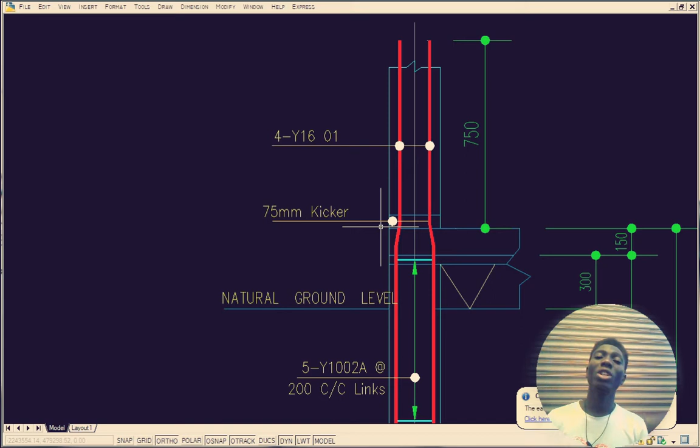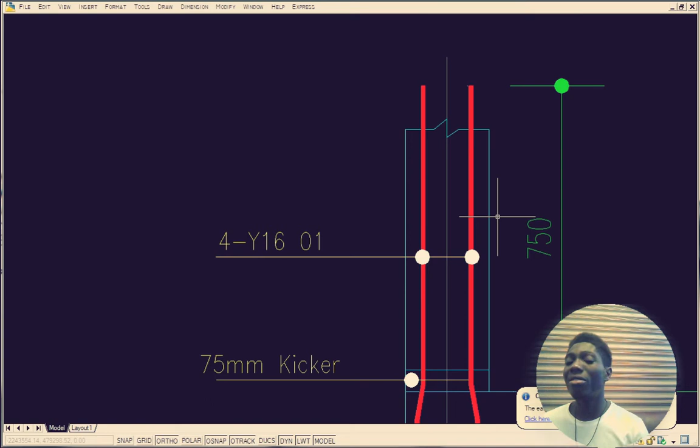So that is that. And then the next detail we'll see is 4Y16. What is that? We need 4 of Y16 to be inside this column. So depending on the cover of the column is what will determine the area of reinforcement and the area of concrete. So that is how we get to calculate that.

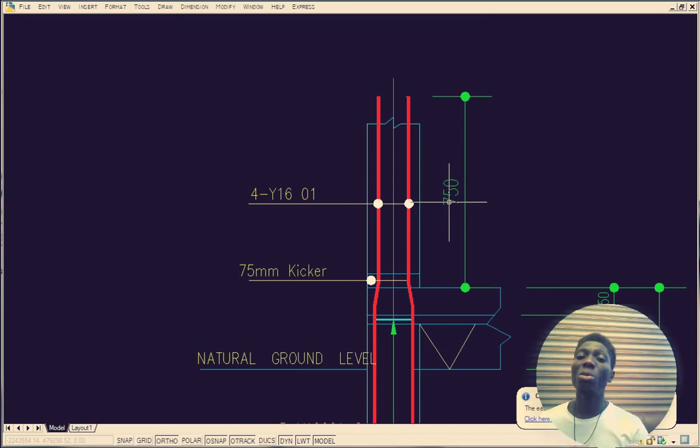So here we have the starter bar. Now the starter bar just gives room for us to connect another reinforcement here, because this reinforcement is coming out from the ground with 0.75 meters, so that is 750 mm. So it's coming out 750 mm from the ground, so that we can join another reinforcement with this reinforcement coming up with the starter bar.